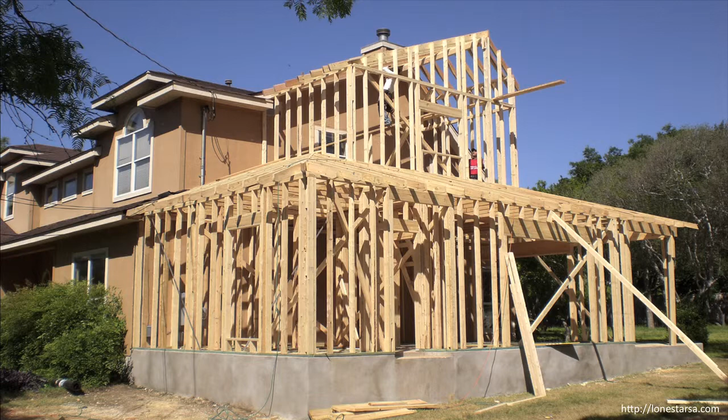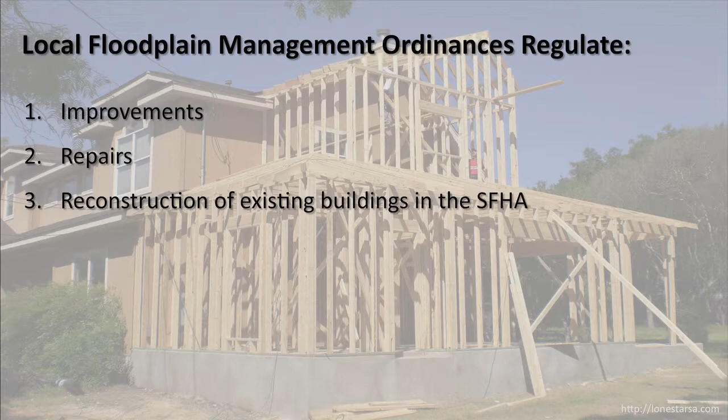Previous videos in this series discuss the regulation of new development, including the construction of new buildings in the special flood hazard area. But what happens when the owner of an existing building located in the special flood hazard area wants to make improvements to his building? Local floodplain management ordinances also regulate improvements, repairs, and reconstruction of existing buildings in the special flood hazard area. These regulations are the subject of this video.

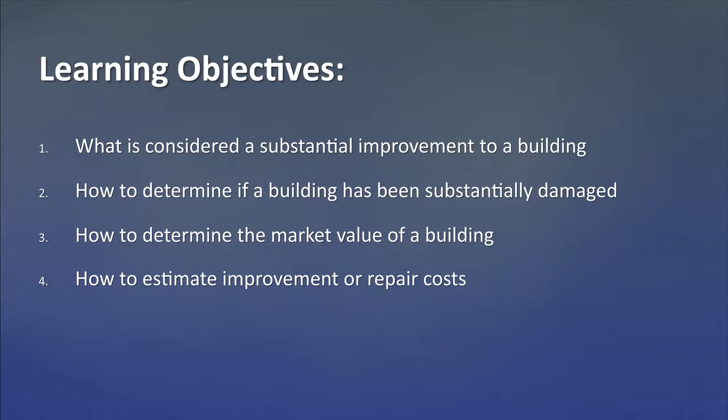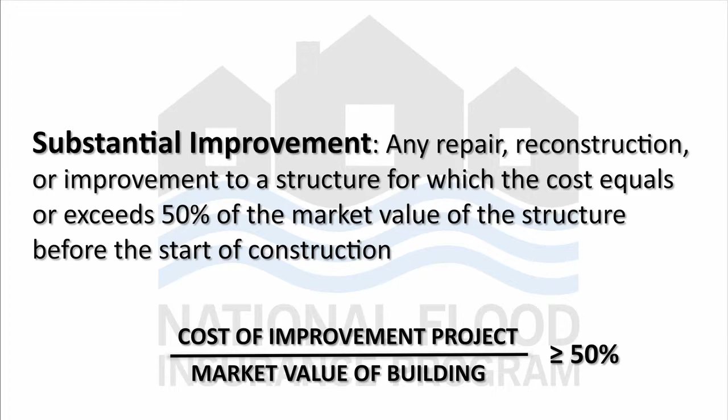The National Flood Insurance Program defines substantial improvement as any repair, reconstruction, or improvement to a structure for which the cost equals or exceeds 50% of the market value of the structure before the start of construction. Substantial improvements can include remodeling projects, building additions, or rehabilitation projects. If a building is being substantially improved, it becomes subject to the requirements of the community's floodplain management regulations.

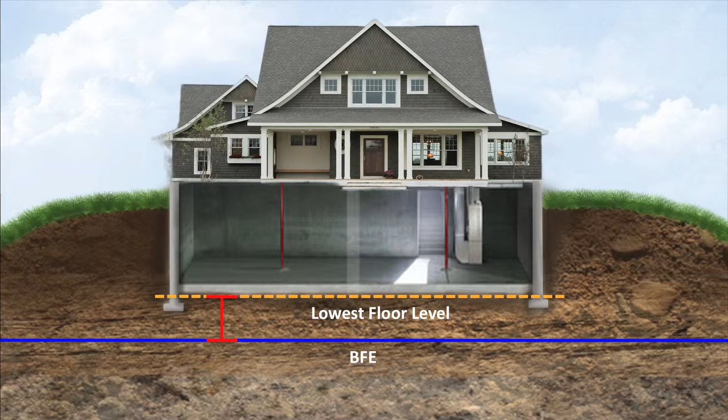In the case of most buildings, this will require that the building's lowest floor, including basement, be elevated at or above base flood elevation. Although elevating a building to comply with this requirement will result in additional expense, it is also one of the most effective means of reducing the risks of future flood-related damages.

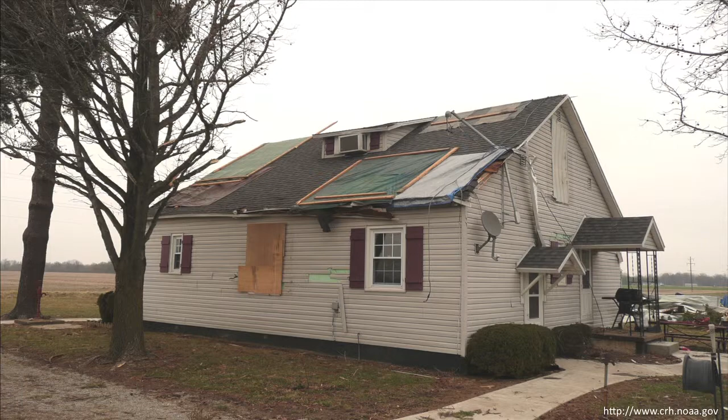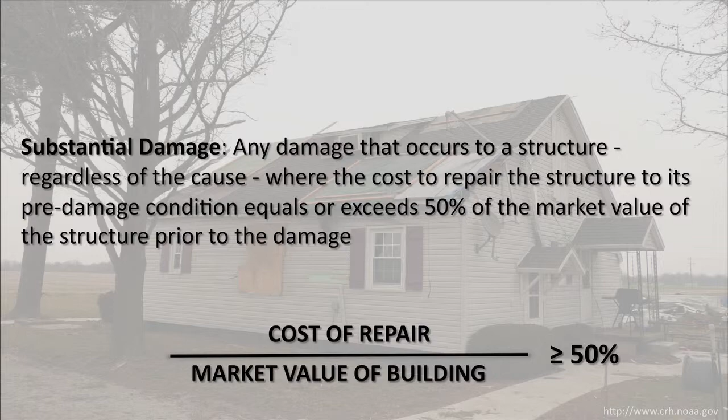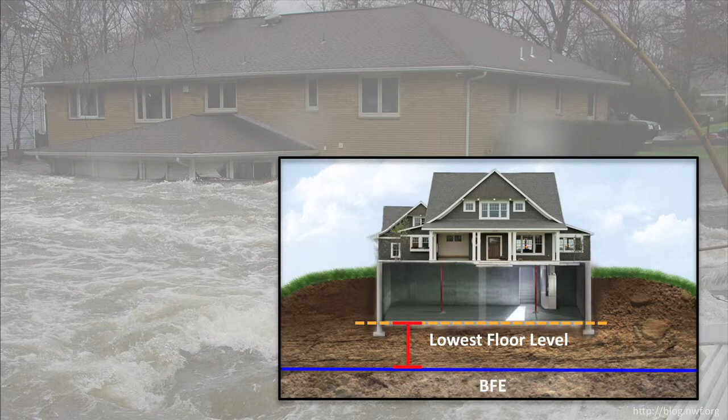Closely related to the definition of substantial improvement is that of substantial damage. Substantial damage is defined as any damage that occurs to a structure, regardless of the cause, where the cost to repair the structure to its pre-damage condition equals or exceeds 50% of the market value of the structure prior to the damage. If a structure is substantially damaged, it must be repaired in compliance with the requirements of the community's floodplain management regulations for new buildings. As was discussed in the previous section on substantial improvements, this will typically require elevating the structure's lowest floor to or above base flood elevation.

Owners of historic structures located in the special flood hazard area who wish to undertake a construction project that would qualify as a substantial improvement may be exempt from complying with the community's floodplain management regulations for new buildings if three conditions are satisfied. First, the historic structure must be registered on either a national registry or a federally certified local or state inventory. Second, the improvements or alterations must not preclude the structure's continued designation as a historic structure. And third, all possible flood damage prevention measures must be incorporated into the project, such as relocating all mechanical and electrical equipment above the base flood elevation.

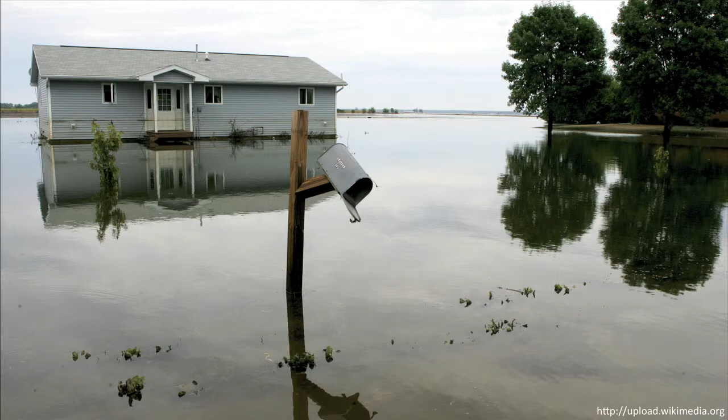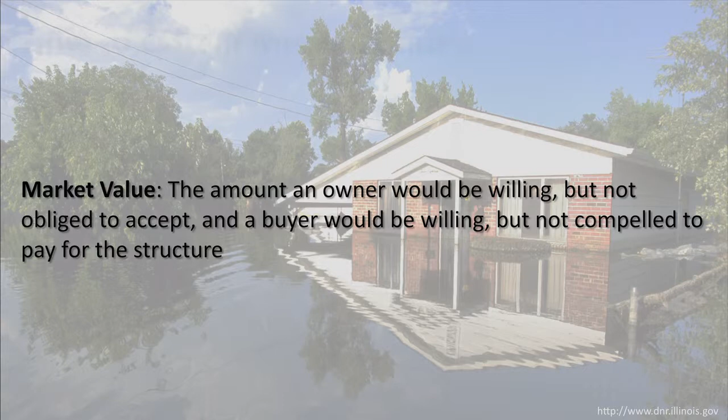To determine whether a structure has been substantially damaged or whether a project will result in a substantial improvement to a property, the local community must first determine the structure's market value. Market value is typically defined as the amount an owner would be willing but not obliged to accept, and a buyer would be willing but not compelled to pay for the structure. The market value of a structure can be obtained from a number of different sources, which include an independent appraisal by a licensed appraiser or the tax-assessed value minus the value of the land.

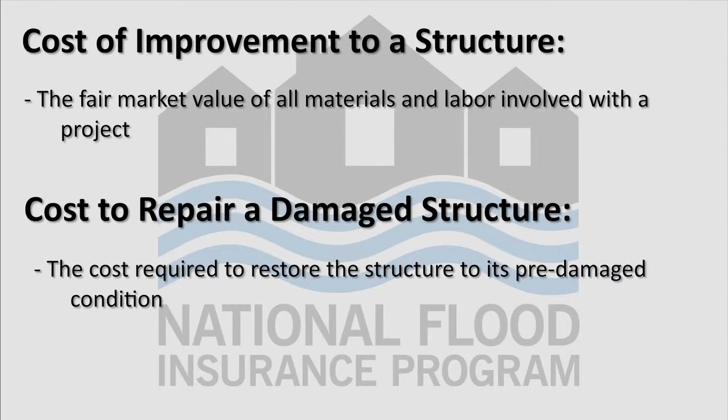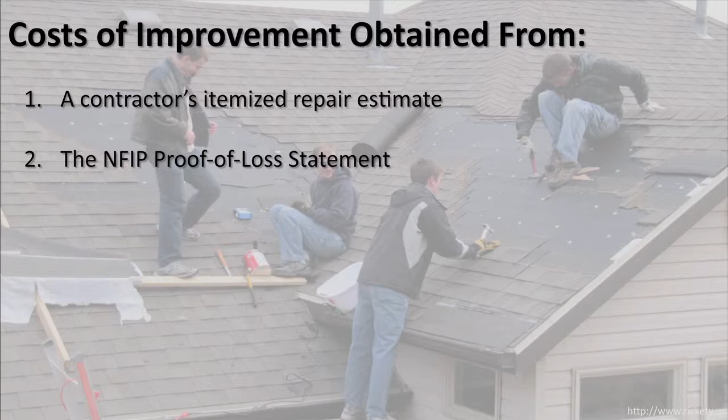The NFIP considers the cost of improvement to a structure to be the fair market value of all materials and labor involved with the project, and the cost to repair a damaged structure to be the cost required to restore the structure to its pre-damage condition. Even if materials or labor are donated or discounted, or if the property owner intends to do some of the work himself, the fair market value of the materials or labor should be used to determine the cost of improvement or repair. These costs may be obtained from sources that include a contractor's itemized repair estimate, the NFIP proof of loss statement, or qualified repair estimates from the community's building department.

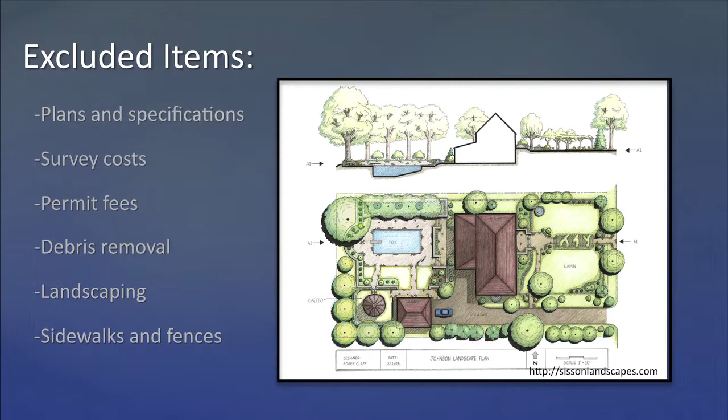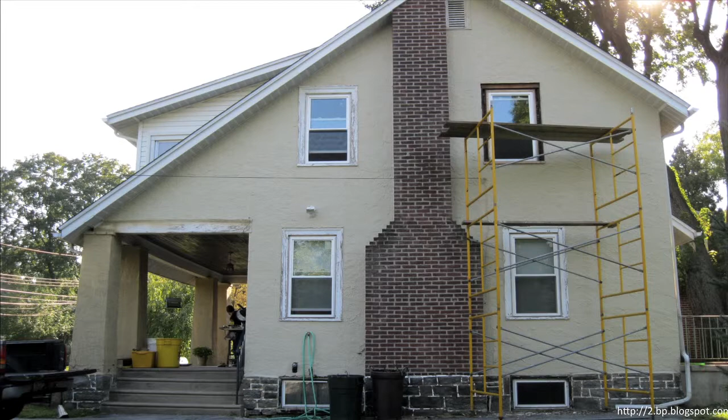Items that are excluded from the calculation of the cost of improvement or repair include plans and specifications, survey costs, permit fees, debris removal, including hauling fees, landscaping, sidewalks, and fences. Several issues commonly arise when estimating the cost of improvements or repairs. First, when calculating the cost to repair a damaged structure, it is important to include all costs required to restore it to its pre-damaged condition, even if the property owner does not intend to make all repairs at that time. Also, the cost of any additional improvements to the structure that the property owner intends to make, along with the repairs, must be included in the total cost of the project.

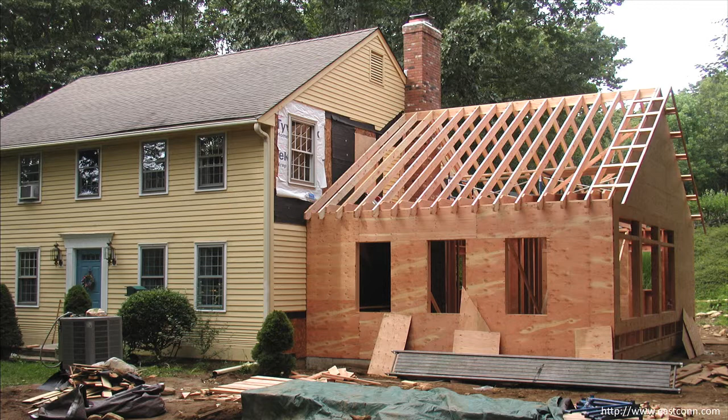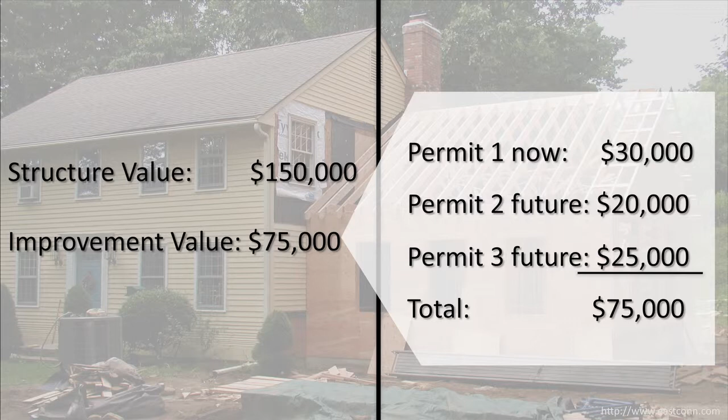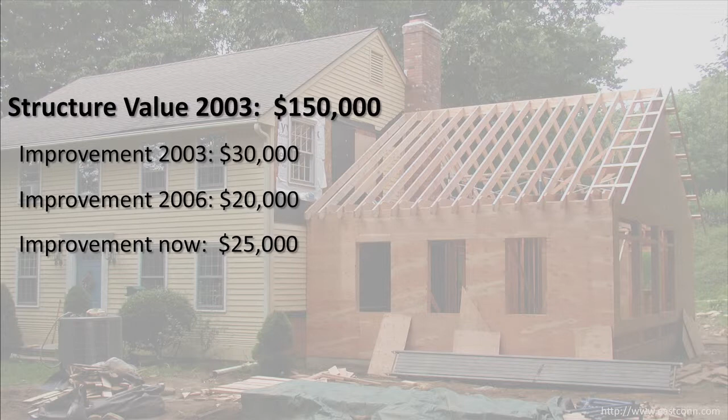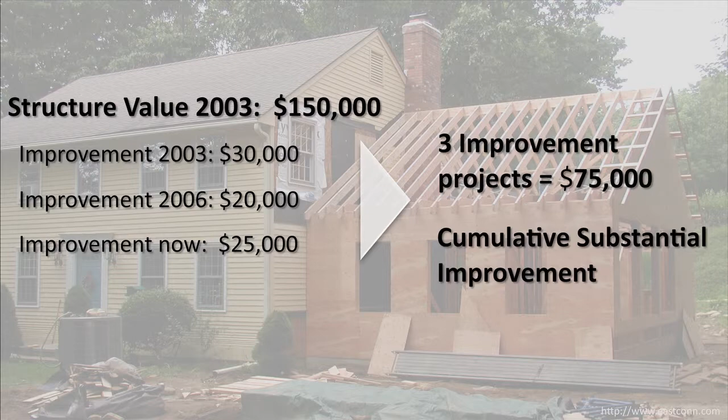Second, property owners will sometimes try to avoid reaching the 50% threshold by applying for a permit for only part of an improvement project, then later applying for a second or even third permit to finish the project. FEMA, however, requires that the entire improvement project be counted as one, even if it is accomplished through several permit applications. Third, a property owner may carry out several different repair or improvement projects to the same structure over several years without triggering the need to meet current standards. This has the potential to greatly increase the total damages incurred in a future flood event. To avoid this, a community may include in their regulations a provision for counting improvements and repairs cumulatively. Cumulative substantial improvement and repair provisions will be addressed in more detail in Video 17.

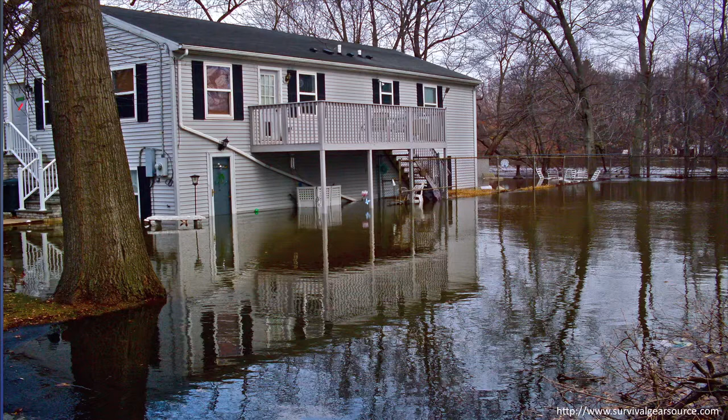A common challenge for owners of substantially damaged structures is the expense of complying with the community's floodplain regulations. However, buildings covered by a standard flood insurance policy may benefit from what is known as Increased Cost of Compliance Coverage, or ICC. When an insured building sustains a direct physical loss due to flooding and the community determines that the building has been substantially damaged, ICC coverage can provide up to $30,000 towards the cost of bringing the structure into compliance with the community's floodplain management regulations.

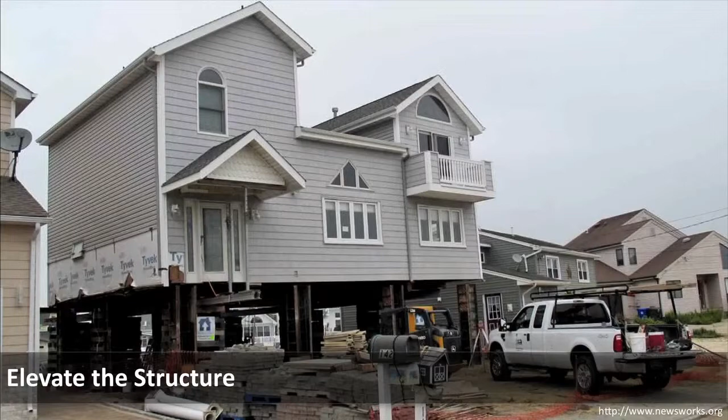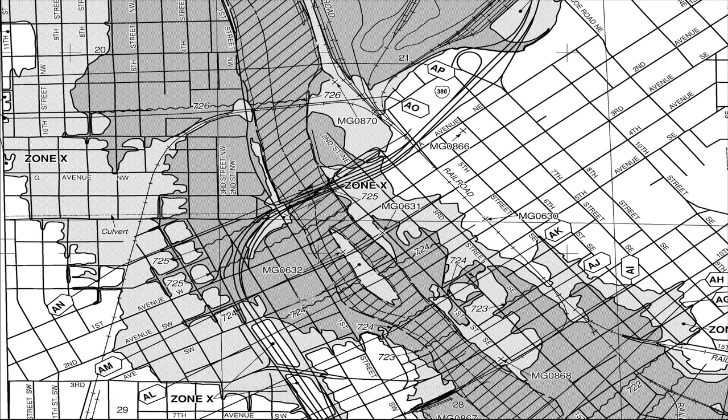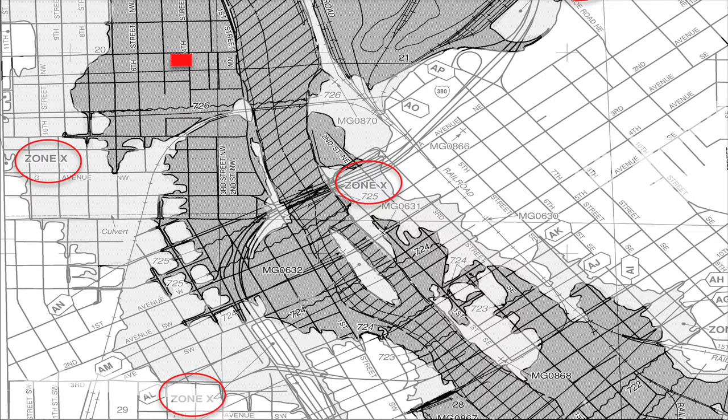ICC coverage can be applied to the cost to elevate the structure, move it out of the special flood hazard area, or to demolish it. However, in order to be eligible for ICC benefits, the building must be located in the special flood hazard area identified by the community's FIRM. Buildings located in zones B, C, or X are not eligible for ICC benefits.

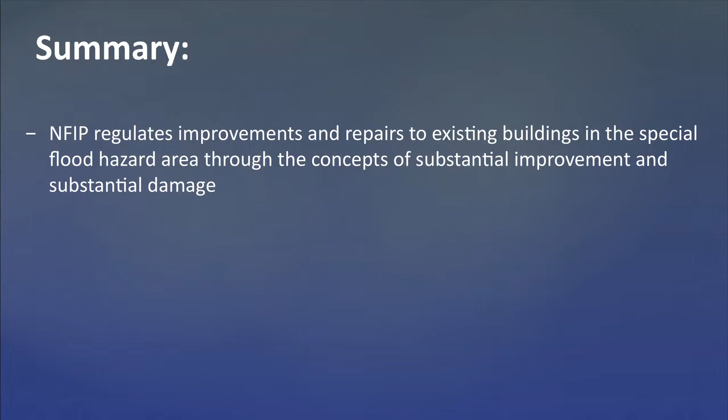Today, you have learned how the NFIP regulates improvements and repairs to existing buildings in the special flood hazard area through the concepts of substantial improvement and substantial damage.